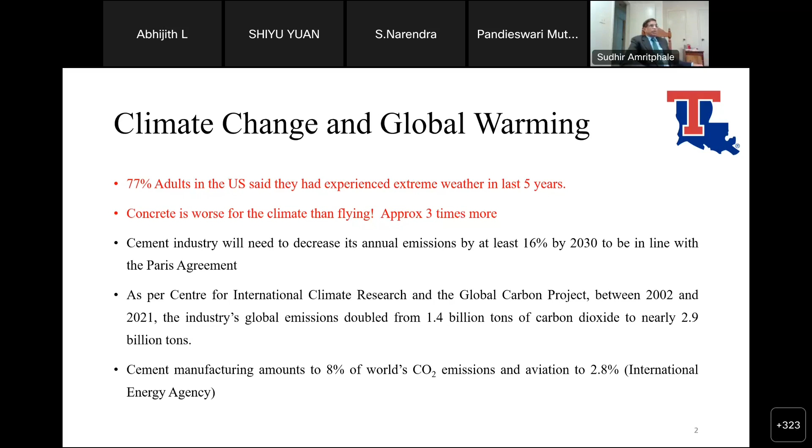If we go further, the USA has gone very seriously into this, and in 2021 California became the first state in the United States to mandate carbon reduction from cement manufacturing. Under that new law, carbon emissions from cement products in the state must be cut by 40% by 2035.

Similarly, New York has also passed a law. And in May, in a wonderful development, big corporations like Microsoft and Google pledged at an international economic summit to begin purchasing low-carbon versions of cement, steel, aluminum, and other major construction commodities that typically have a high carbon footprint.

So from this slide, what we want to draw attention to is that unless governments all over the world make laws for development of advanced materials to tackle the serious issue of climate change and global warming, the pace cannot be picked up. So it is my humble request to all the dignitaries attending this international conference to make a note of this and send it to the highest authorities of all countries in the world. Then only it can be implemented, and it has to be implemented jointly, not individually, country-wise.

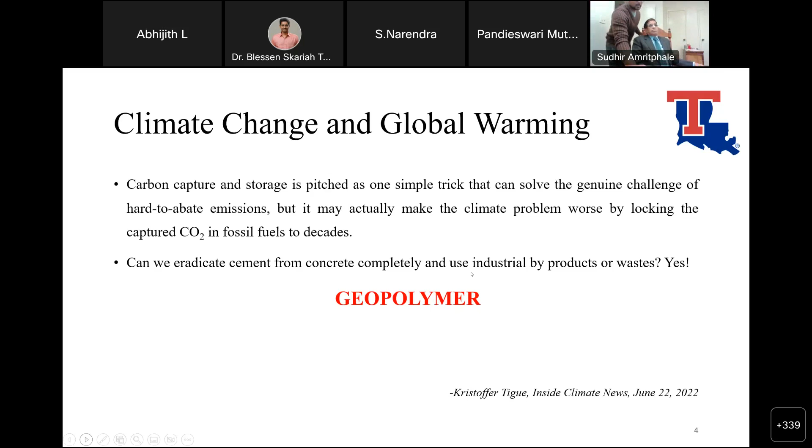Okay, so most of the dignitaries attending this conference are aware about geopolymer, because a lot of work has been done in the last 40 years. The father of geopolymer is Professor Davidovits. We are highly obliged to him for coining this word and for emphasizing the science and technology based on geopolymer by arranging a conference on geopolymer every 6 months.

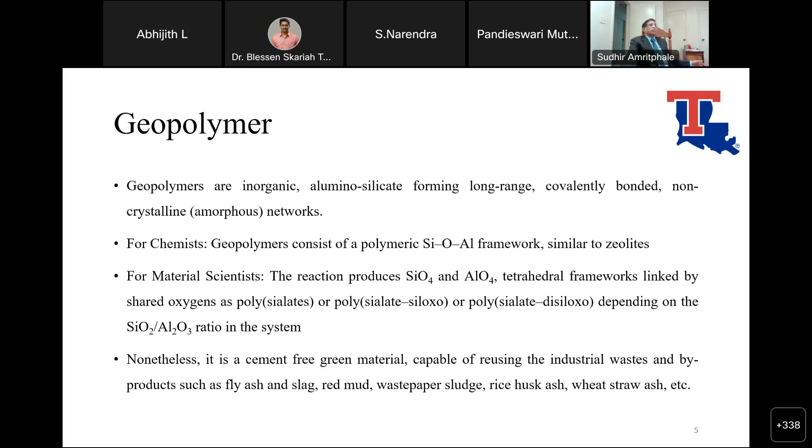Yes, of course, geopolymer is basically made using any waste material which contains silicon and aluminum, using an alkaline solution. Then there is a polycondensation reaction, and unless we have a Si-O-Al linkage, it is not a geopolymer.

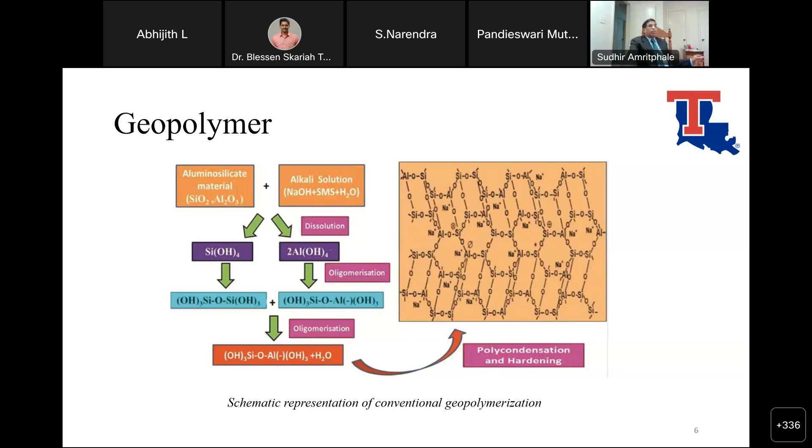Normally people get confused about alkali-activated material and geopolymer. Alkali-activated materials are different from geopolymer, because for a material to be called geopolymer, to have its function and properties, there has to be a Si-O-Al linkage. Unless it is there, it cannot exhibit properties like acid resistance, corrosion resistance, fire resistance, heat resistance, and all the other wonderful significant properties which geopolymer possesses.

Now, my sincere request again to all the audience and dignitaries is, what can we take up immediately in the area of geopolymers? What are the immediate avenues and applications of geopolymer? Because a lot of work has been done on geopolymer, but it is still on the lab scale, and it is struggling to come out of the laboratories.

So the first thing we thought is, there is now a lot of concern about CO2 emission. And the moment we think of CO2 emission, it is only geopolymer, because the primary fundamental material which absorbs carbon dioxide is sodium hydroxide. Therefore, for the very serious concern of CO2 emission, whether from thermal power industry, steel industry, or cement industry, the main concern is how to have dynamic carbon dioxide sequestration, and the solution is geopolymer.

Next I'm going to talk on fast and economic construction practices, infrastructure and precast construction, radiation, EMI, neutron shielding for important structures, water conservation and sea coast protection, and advanced geopolymer construction practices.

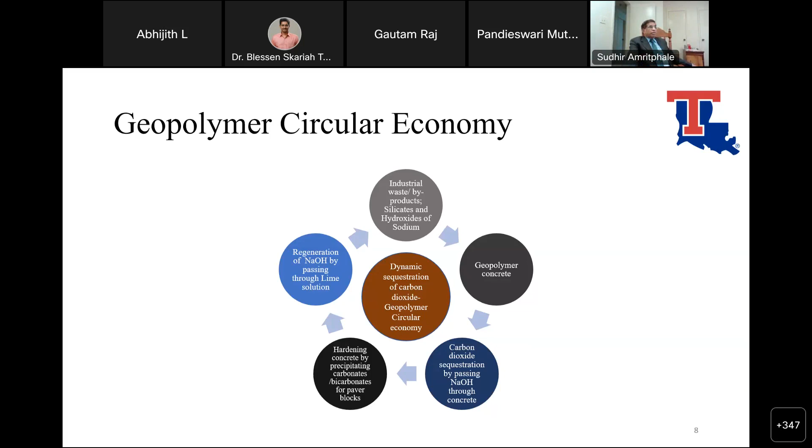As you know, an inherent property of geopolymer is that it sets very fast. When I was working on this—I am a material scientist, and the team which helped me a lot throughout my career at CSIR AMPRI Bhopal worked on geopolymer solutions. Recently, Dr. Sheikh has joined our group, a very intelligent, very innovative scientist. Generally we think fast setting is a negative point for geopolymer.

But no, sir. By appropriately controlling the setting time, now we need a material which sets fast—for example, for runway repair, for making roads, for making any structure which sets fast, which also saves cost. So therefore, there is a need for a geopolymer-based material which sets fast and is also a cost-effective construction material.

The basic requirement for 3D printing is that the material should set very fast, because when we are doing 3D printing using conventional concrete, there is a need to add a lot of additives to achieve fast setting and to achieve joints devoid of pores. Fast setting is inherent in geopolymer, and one of the best properties available in geopolymer is that it is devoid of cold joints in successive layers of formulation.

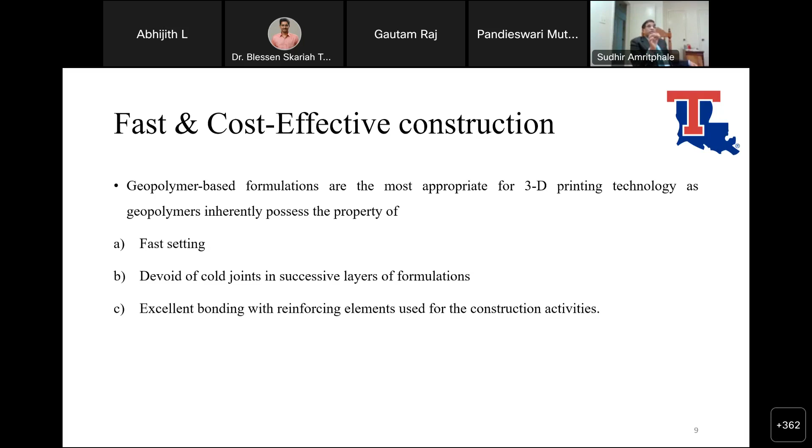Other than that, unlike conventional cement concrete, there is inherent fire resistance because of Si-O-Al linkage. There is chemical resistance because of Si-O-Al linkage. There is waterproof properties because we can have ashes from bio waste, for example rice husk. It is a very good source of silica that can be made in nano form, and we don't need to depend on any natural source for silica because rice husk can be cultivated; it has been cultivated and it is a waste material. So we are cultivating the nano silica particle, which is very useful for providing waterproofing properties to the concrete and to the geopolymer, and of course it provides heat insulation also.

In the era of energy saving, climate change, and global warming, there is a first and foremost need for building material to have a coating which gives maximum heat insulation, in general to save a lot of energy and assist survival of people in Asian countries, because heat storms harm more.

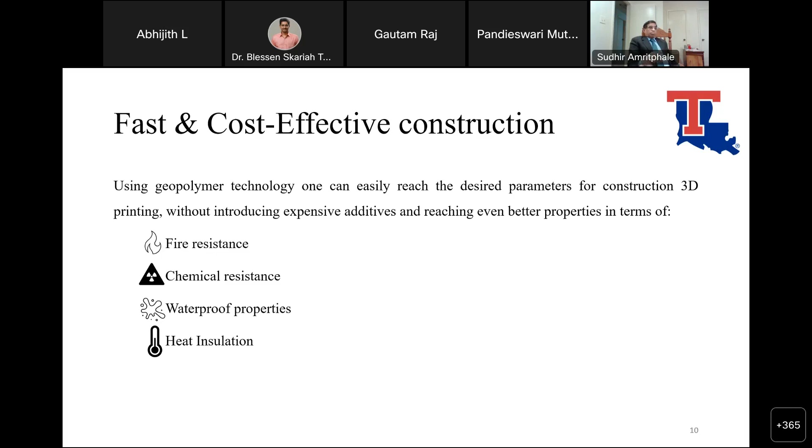The Renca group from Russia has advanced very fast in cost-effective construction using geopolymer concrete by 3D printing. They hope the novelty will live on because we cannot depend only on raw materials like fly ash, slag, etc. We've got to use localized soil mineral strata using one-part technology of geopolymer, developing and optimizing the processing parameters to make a geopolymerizable inorganic resin, called so far geopolymer.

The future is not going to depend only on cement factories for cementitious material, because to have one cement industry requires huge capital investment that the normal public cannot do. But in geopolymer, using localized soil mineral strata with one-part geopolymer technology, it can be done in a very localized area with minimum training all over the world. That is the beauty of geopolymer, that it is a universal material for all the people by all the people, whereas the cement industry requires capital investment.

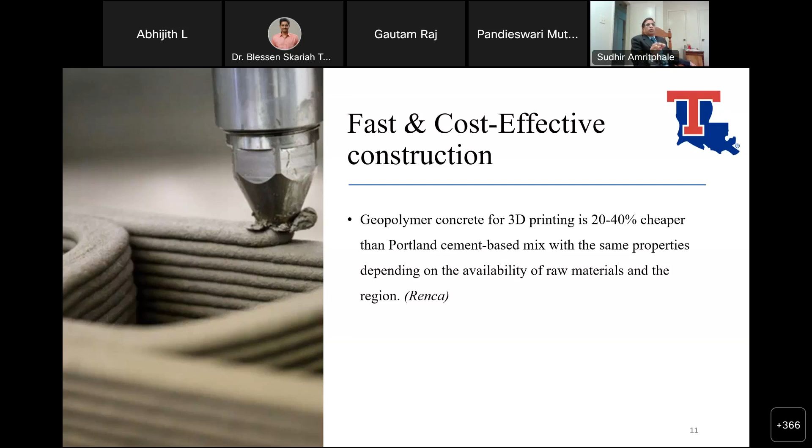Now we all know that there is too much need of infrastructure for runways, roads, and precast housing. We are very fortunate that especially China and India have gone for infrastructure at a very fast speed, and it is to be appreciated wholeheartedly. But in European countries and in the USA, the structures have been very, very old. There is a need for new infrastructure that enables fast-setting materials which can repair all these things. So therefore, geopolymer has the potential to be used in precast construction.

Now the era has gone when we used to make on-site in-situ houses. In the USA and European countries, they are already making their houses and structures based on prefabricated building material components. And why shouldn't Asian countries do so? Because 3D printing and precast construction is possible in 24 hours, we can deliver the product, and that is how geopolymer will become a cost-effective alternative by working on precast, prefabricated materials for infrastructure, for roads, for precast housing, etc.

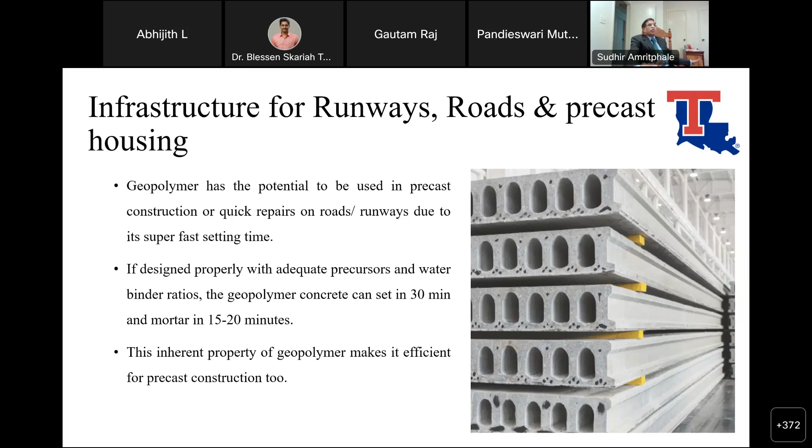I was fortunate that my team at CSIR AMPRI Bhopal, since people generally ask what is the durability of geopolymer and is it practically possible to demonstrate its use for the public. The civil engineering team of my group, Dr. Manish Mudgal, Mr. R.K. Chauhan, Dr. Akram Khan, and all my colleagues Dr. Sarika Verma, Dr. Dipti Mishra, we all demonstrated a cement-free concrete road using geopolymer for public use in the premises of AIIMS Bhopal, India.

The road was constructed in between the conventional cement concrete road to see the durability and evaluate the properties, because on the same road we compared traffic load running on geopolymer as well as conventional concrete. We found there were cracks in conventional cement concrete, but theoretically there cannot be any crack in geopolymeric structures and materials, because it is highly viscous in nature and shrinkage is definitely much less compared to conventional concrete. So this road has been made for public utilization and it is in use.

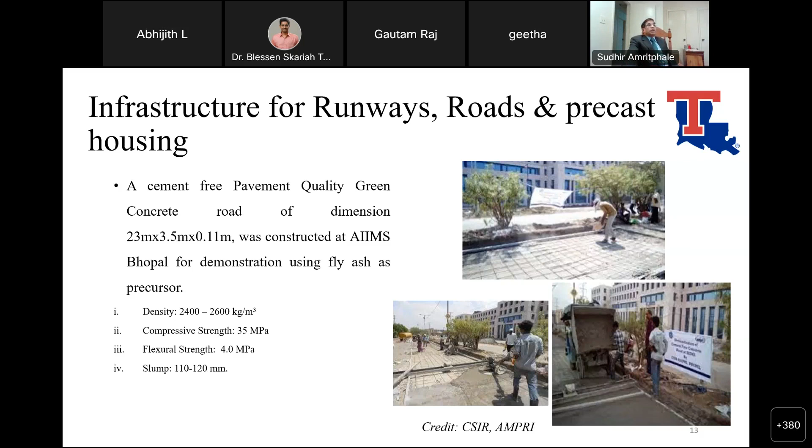Already people in Australia are the first to work very vigorously on geopolymer. They have made a runway, they have a road, they have precast housing also. The precast panels making, I think, is the simplest thing to do with geopolymer. Within 24 hours, the same mold can be used every 4 hours, and we can construct multi-story buildings using precast panels of geopolymer. Australia has a 4-story high building for general public use.

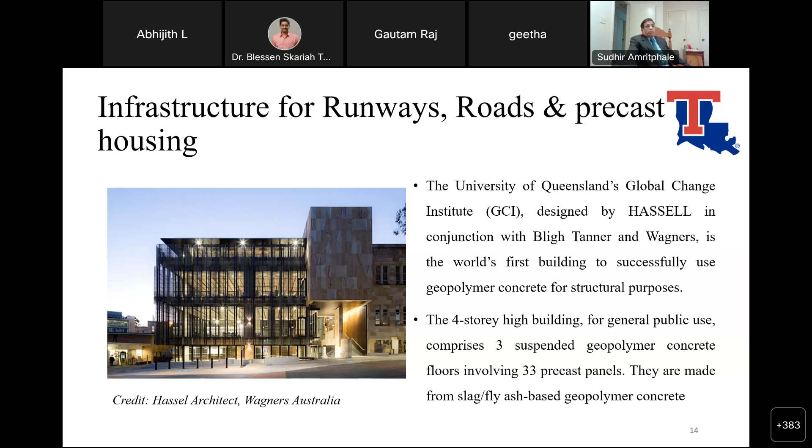Now apart from that, what area is needed for doing research? As we know, we are living in the era of radiations. We use mobile phones, there is radiation. Energy production from nuclear power plants, there is radiation. We go to hospital for diagnosis, there is X-ray, there is MRI. So we are more and more surrounded by radiations.

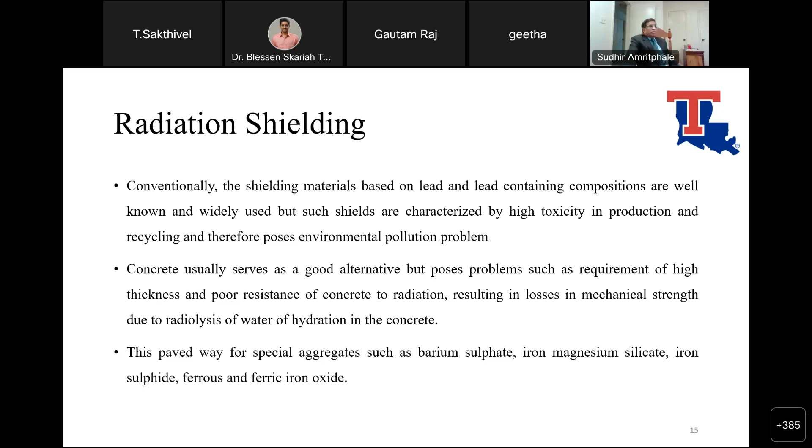And for shielding these radiations, there is a need of radiation shielding materials, and the shielding materials can all be made using industrial waste. Why? Because general conventional radiation shielding concrete is made using heavy weight aggregate, for example hematite, magnetite, or barite ores or iron ores, in a conventional cement matrix. Because conventional cement is not a viscous material, there is segregation of the heavy aggregate used for making radiation shielding concrete, and therefore we cannot achieve a homogeneous radiation shielding matrix using conventional cement concrete.

Whereas in geopolymer, because it is viscous in nature and possesses chemical binding with aggregate as well as reinforcement, it enables segregation-free, homogeneous radiation shielding matrix and enhanced mechanical strength due to excellent binding of aggregate and reinforcement to the geopolymer matrix in the ITZ, also giving heat and fire resistance property in addition. So this is the property of geopolymer which is to be exploited very fast for making radiation shielding material.

At USA, under the umbrella of Louisiana Tech University, under the guidance of Director of Trenchless Technology Center Dr. Matthew, and with the help of founders of LKV Geopolymer Solution, we have developed EMI radiation shielding material, that is radiation from mobile. Nowadays there cannot be any sensitive structure without EMI radiation shielding properties. And we are on the way to develop X-ray shielding, gamma shielding, and neutron shielding properties, which is the immediate need for strategic applications as well as civil applications.

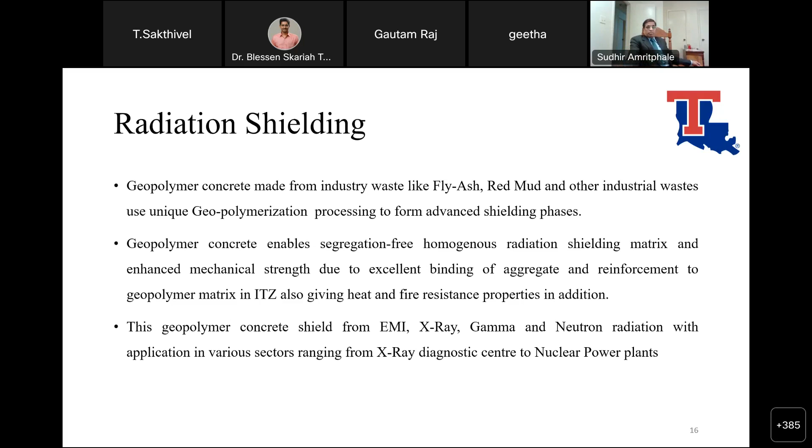Yes, the radiation shielding is required for diagnostic and radiation treatment, nuclear power plants, advanced bunkers, etc.

Now the next avenue I would like to explain a little bit. Yes, please. I hope there is some more time for me? Yes sir, you can continue.

So now the biggest challenging area is air, we have carbon dioxide, and geopolymer is the solution. For thermal power plants, there is fly ash, there is carbon dioxide. We are able to use carbon dioxide sequestration, we are able to use fly ash. We have the steel industry, we are able to use all the waste from the steel industry as slag, iron ore fines, mill scale, or red dust, everything for making geopolymer with improved properties. If you have nuclear power plants, we have material for making radiation shielding material using geopolymer. There is radioactive waste which can be ideally and most effectively encapsulated in a geopolymer matrix. The next area after air, water, and industry lies in water conservation and sea coast protection.

Fortunately, geopolymer can be made using various alkaline ions, for example sodium and potassium, and these ions can behave as ion exchange membranes. Therefore, pervious geopolymer concrete can be used for removing pollutants from water bodies.

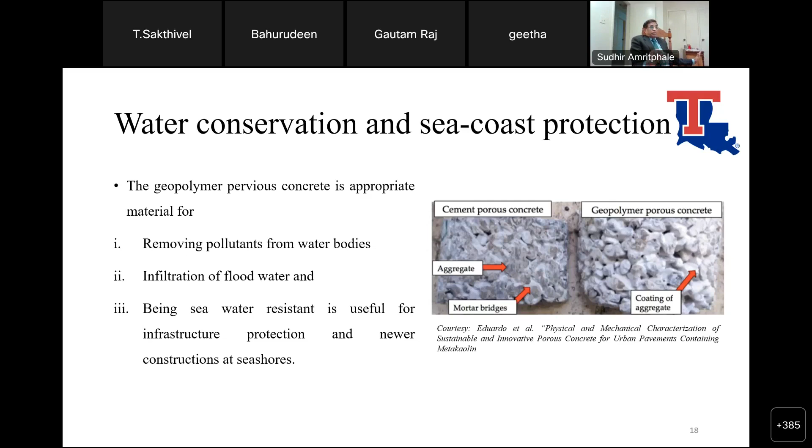So this is the development that has been done on water conservation and sea coast protection at my company, LKV Geopolymer Solutions, in collaboration with Louisiana Tech University's Trenchless Technology Center, for which Dr. John Matthew is director.

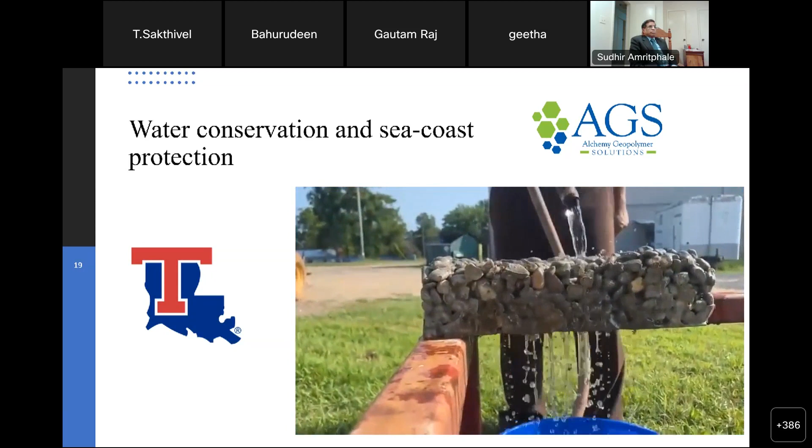Now the last topic avenue I am going to discuss is advanced geopolymer, just to understand how to go for large scale commercialization of geopolymer material. The only way is making one part geopolymer, because it will help overcome the problem of frequent change in characteristics of raw material used for making geopolymer, since we can tailor the properties of geopolymeric powder cement.

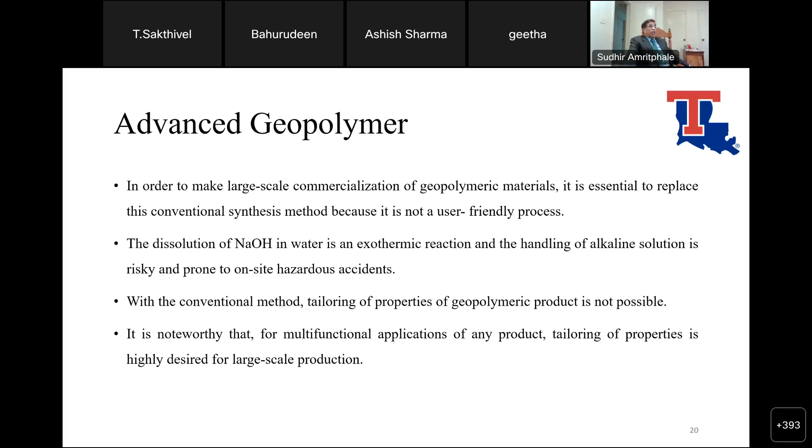Using solid state geopolymer formulations, depending on various application spectrums and desired functionality, we have already patented an advanced technology for making one part geopolymer using mechanochemical processing, capable of making geopolymer powder in solid form which needs only water to be added. The formulations differ for each application, and depending on the required functionality, they can be very fast set or very delayed set. They can be used for on-site in situ construction, for 3D printing, and many other applications.

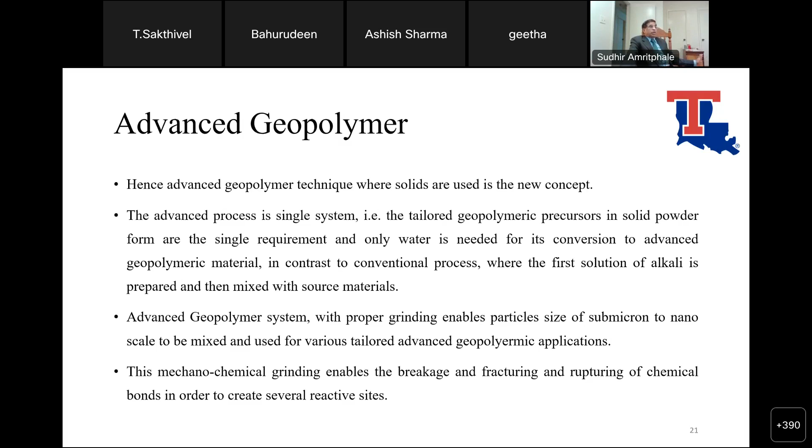For those interested in knowing more detail, we have published a chapter on advanced geopolymer technology describing a novel mechanism of how mechanochemical activation energy helps form unstable silanone species from siloxane, that is quartz silicates. This figure depicts the solid state chemical transformation using sodium silicate, sodium aluminum silicate, and sodium aluminum oxide.

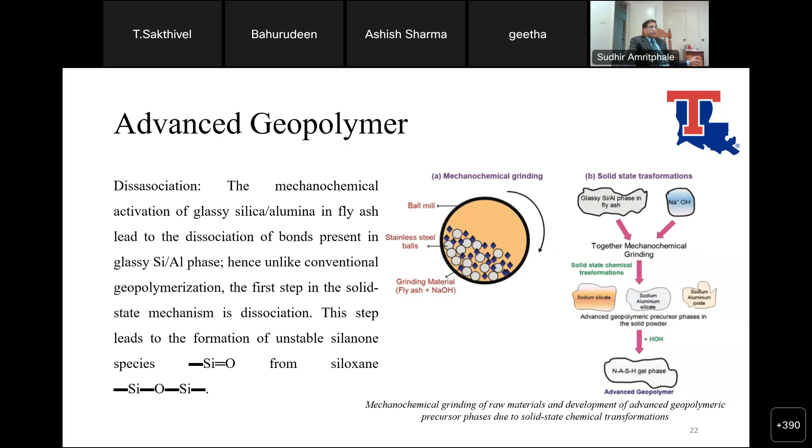This is just an example, but depending on the application, the raw material can be changed to achieve specific functionality, whether for radiation shielding material or other applications. We have come out with a new mechanism confirming a unimolecular nucleophilic substitution, SN1 mechanism, where in the presence of water, silanol forms from Si=O linkages, and geopolymeric gel is formed, which on drying produces advanced geopolymeric material with considerably enhanced properties at ambient temperature.